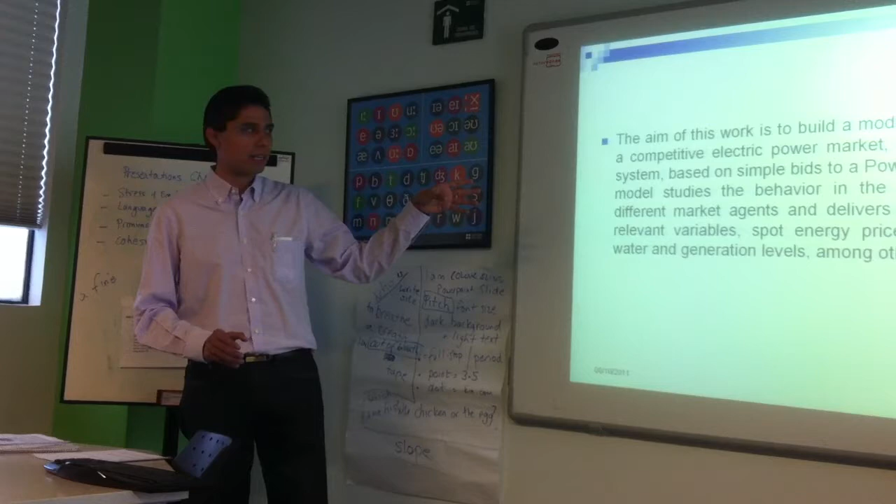Okay, the objective of this work was to build and program a model able to use in an optimal way the stored water in hydroelectrical plants to produce electricity. Obviously, taking into account key information like spot energy prices and how to use the stored water.

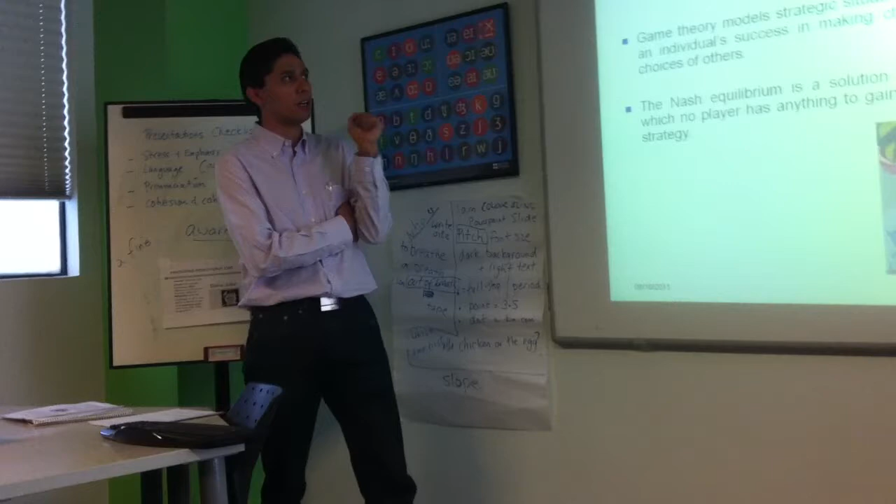Okay, one of the topics or the information that I use is game theory. This game theory was initially developed by John Nash. This is a mathematician that won the Nobel Prize of Economics in 1994. And when he was studying his PhD, he became a little bit crazy. But in his craziness, he developed this theory.

And basically, it's to interpret interaction among companies, human behavior, and others. Nowadays, it has other applications like in war and negotiation between companies and unions, etc. And the most important is this one, the Nash equilibrium. It explains that you are not able to change your options if you agree with the behavior of others, basically.

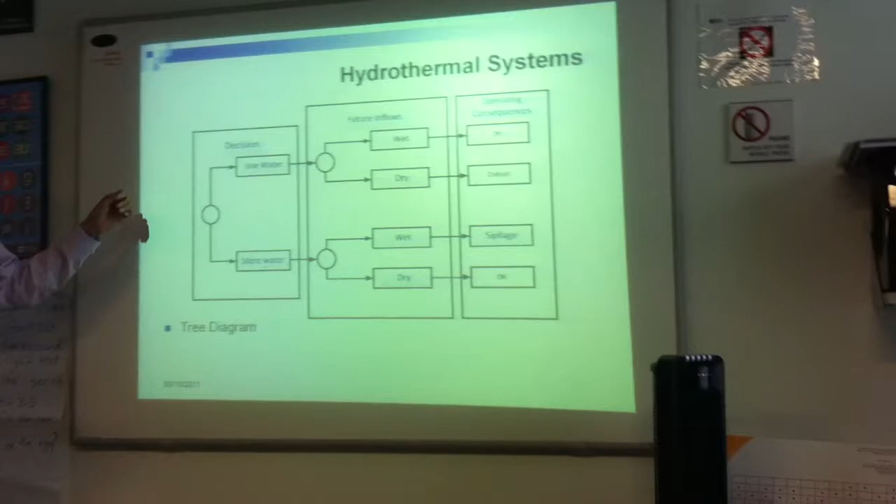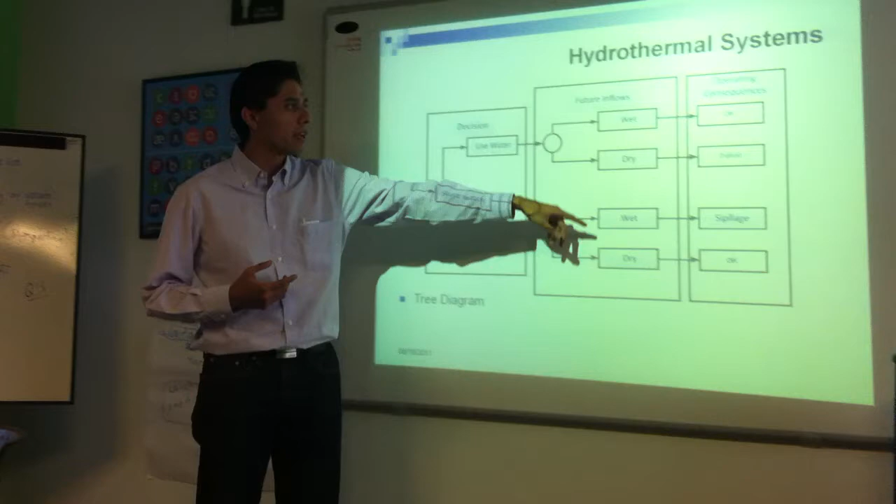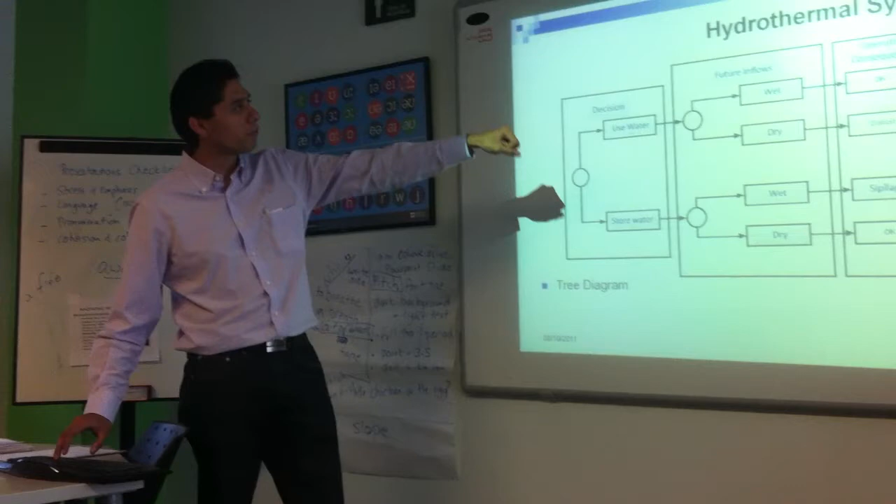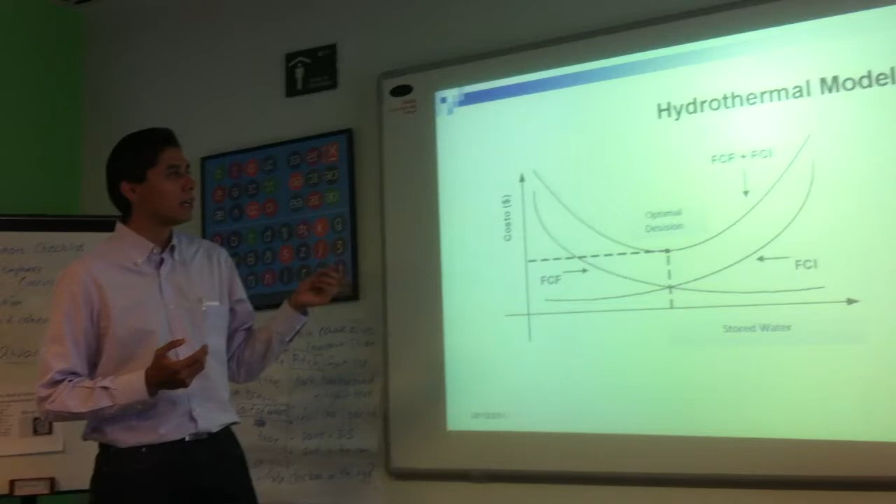Okay, hydrothermal systems. This is important because we have to make decisions about using water. For instance, if I use water today, but maybe it doesn't rain enough, we can have a dry year. Obviously, the consequence is in the future we are going to have a deficit of energy. So it's important to develop a model that takes into account those future inflows. So the model consists of taking into account current cost and future cost. We have to reduce the cost of fuels, and also we have to be prepared for the future.

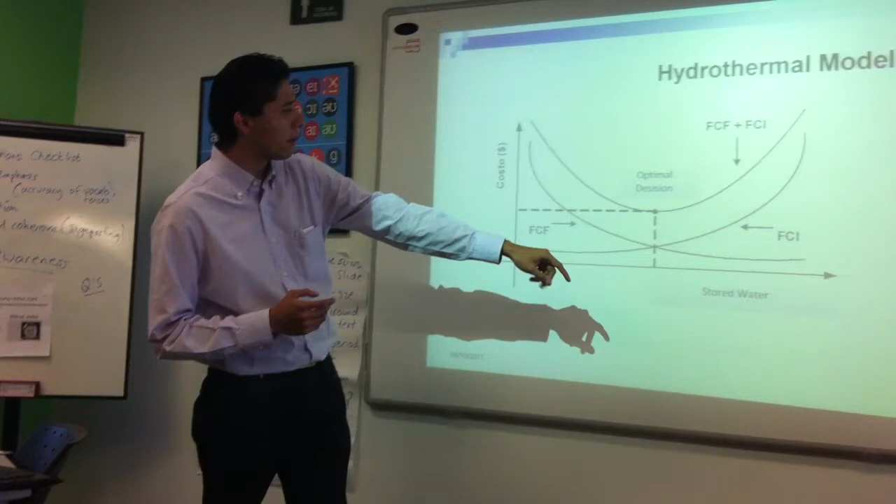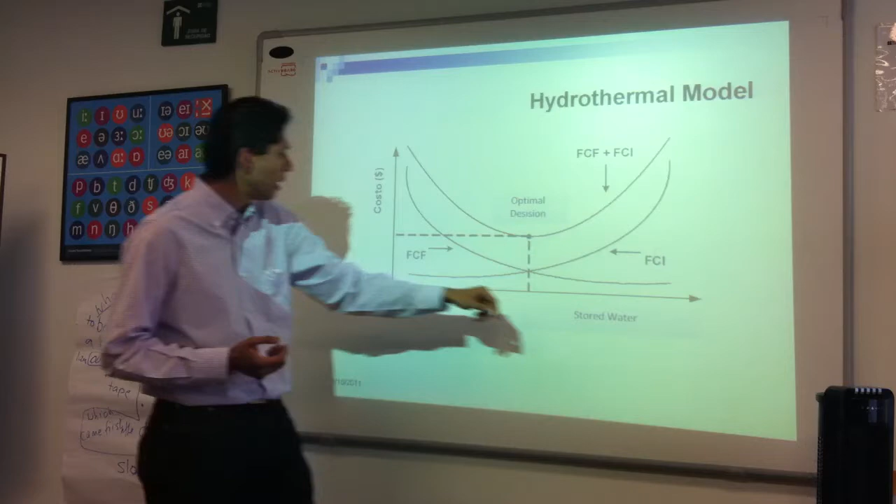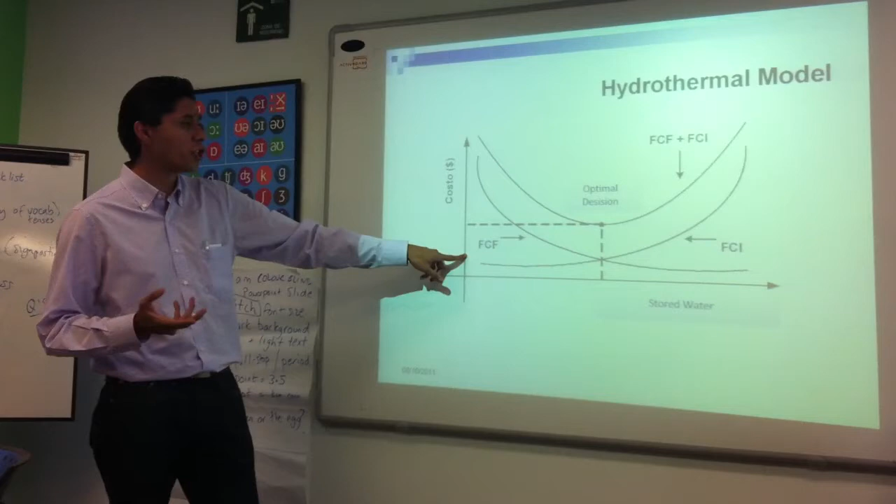In this slide, we can see that if we store water today, the current costs are so high because we are using a lot of thermal production. But on the other hand, if we store water today, it means that in the future it will be, how can we say, so cheap to produce electricity because we will have available a lot of water. Okay, so we developed a mathematical model to interpret this phenomenon.

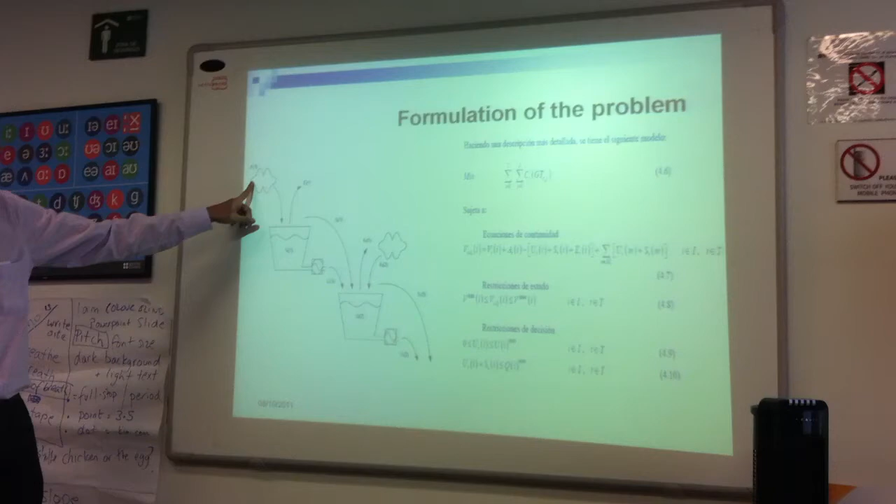You can see this is the dam. These are the generators. This is the rain, inflow rains, and this is the production, or the water that we use to produce electricity, and these can be spills. So this method consists of an objective function subject to some restrictions, basically to avoid flooding towns.

Well, how can I solve it? With dynamic programming, which basically consists in splitting a big problem into smaller ones, and then the program that I made generates a lot of solutions backwards, and finally we connect the dots forward to have an overall solution.

Okay, the conclusion of the dissertation is that we can use water to reduce cost, or we can use water to increase prices of energy. It's important to have these models because most of the time we just use water for agriculture issues, but also we can affect the price of electricity with these plants.

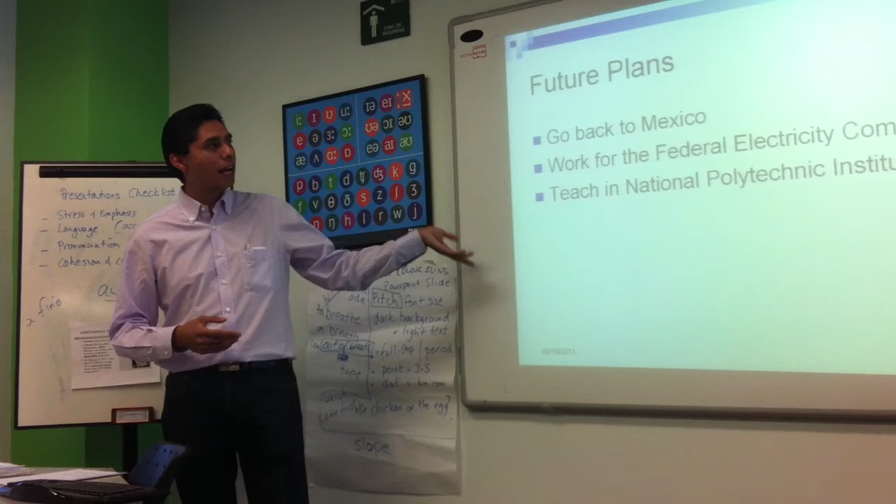Okay, my future plans obviously are to go back to Mexico, and how can I pay my loan if you give me the scholarship? Okay, nowadays I work for the Federal Electricity Commission, and the idea is to ask for permission to do the PhD, then come back and work again in the same company, and to give classes in the National Polytechnic Institute.